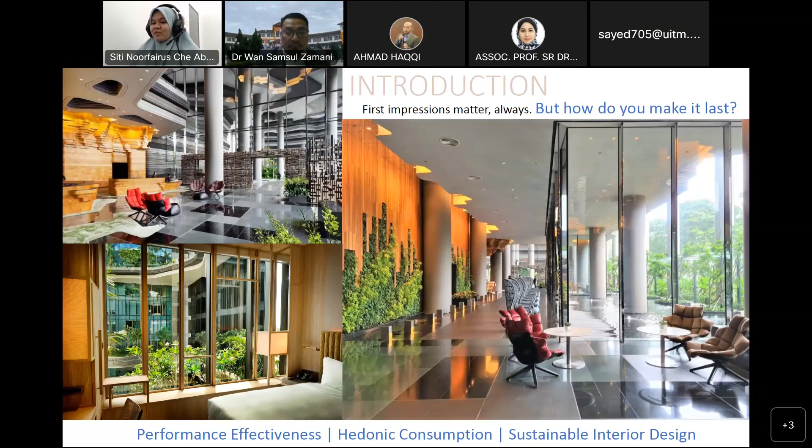Previous researchers support that interior design plays an important role in human mood and social behavior. Hotels are concentrating on aesthetic values as one aspect of perceived experiential value, meaning customer perception towards their staycation experience.

People often see interior design only on the surface of aesthetic visuals, but good design really depends on its solution to give the end user the quality of life they need. It needs to function technically, environmentally, and socially.

Hotel sustainability in business relies on customer satisfaction with the products and services the hotel offers. Since hotel industry services are various and complex, it is crucial to recognize the contextual characteristics and understand the surrounding environment of operations through proper facilities management. Facility management involves multiple disciplines to ensure the functionality of the built environment by integrating people, system, place, process, and technology. To conclude, hoteliers should constantly address the FM concept for business profitability.

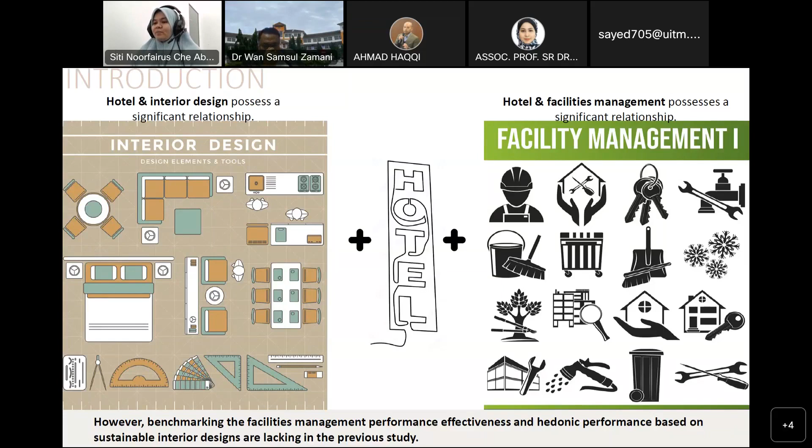To summarize, studies show that hotel and interior design possess a significant relationship, and most studies show hotel and facilities management possess a significant relationship. These two studies are often researched separately, and there is a need to link the study of facilities management performance effectiveness and hedonic consumption based on sustainable interior design criteria.

The activities that happen within the hotel involve customer bookings until checkout. It revolves around people, place, and process. These 24-hour activities, even more during peak holiday seasons, happening inside the hotel industry has an impact on degradation of the environment.

Hotel sustainability in business relies on customer hedonic consumption towards the product and service they experience. Sustainability issues on maintenance management of aesthetic performance, hospitality services, and awareness of sustainable interior design are among significant concerns in hotel performance effectiveness.

In a hotel, the issues in maintenance management of interior design components include dampness, cracks, detachment, wear and tear, as well as biological issues.

Performance effectiveness is defined as the accomplishment outcome of evaluating the building performance to understand how the building meets the design, functions, and its capability. This effectiveness can be measured using a facilities management approach through building performance evaluation.

Therefore, this study aims to identify the components of sustainable interior design requirements relating to facilities management in performance effectiveness and hedonic consumption. The sustainability interior design components will be explored to see their suitability to the context of facilities management towards performance effectiveness and hedonic consumption in the hotel industry.

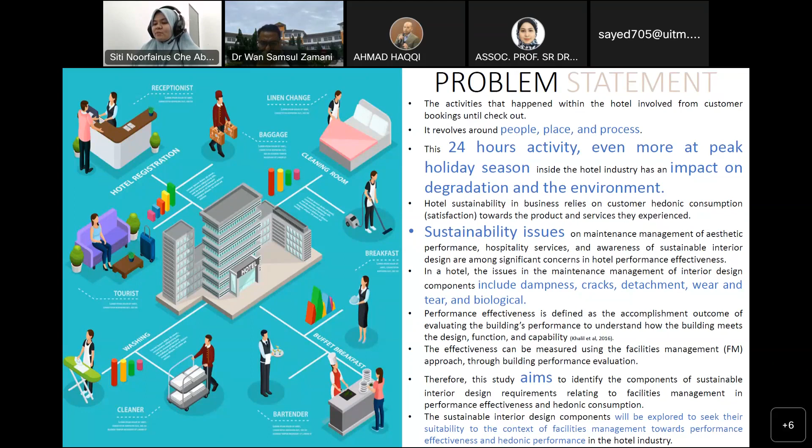Methodology: To establish the aim, qualitative research using semi-structured interview instruments was selected. Purposive sampling was chosen, involving 3 experts. The selection criteria of the experts were chosen from the GBI website. GBI stands for Green Building Index.

The interview session was carried out on separate dates and times and took about 30 to 45 minutes per session. The interview used open-ended questions, and the responses were audio tape recorded and later transcribed into a written document. The data was then analyzed using content analysis and the network presentation of ATLAS.ti9 qualitative software.

The quotations and responses from the interview session were segmented using deductive techniques, where the codings and themes were preliminarily prepared to help achieve the aim.

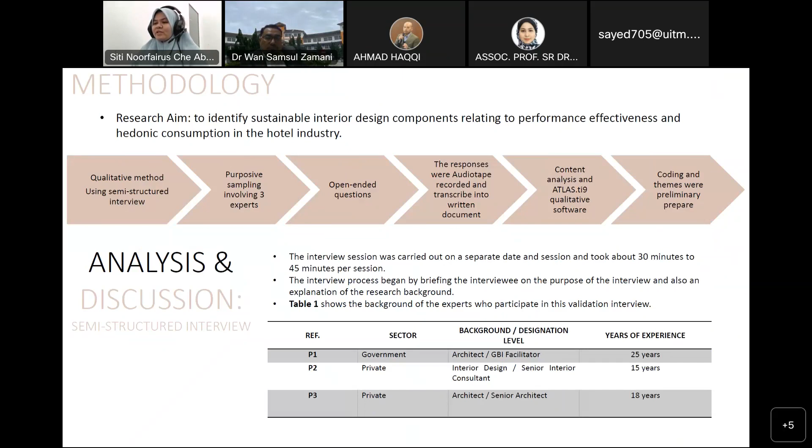Analysis and discussion. Table 1 shows the background of the experts who participated in this validation interview. All participants represent both government and private organizations. The participants comprise senior architects, senior interior designer consultants, and a GBI facilitator. All of the experts are acknowledged in the field of designing green hotel projects, as well as other categories of green projects. In terms of years of experience, all participants have 15 to 25 years of working experience.

The first finding is the suitability and selection of sustainable interior design impacted to performance effectiveness. A summary of findings: the participants agreed that sustainable interior design is associated with hotel performance effectiveness in functional performance, environmental performance, technical performance, and social performance.

Ideally, these performance elements relate to the context of facilities management. As supported by previous research, the robustness of functional and technical aspects is needed for routine extensive maintenance, which includes adaptability, aesthetics, and durability of materials to cater to unplanned functional and technical failures.

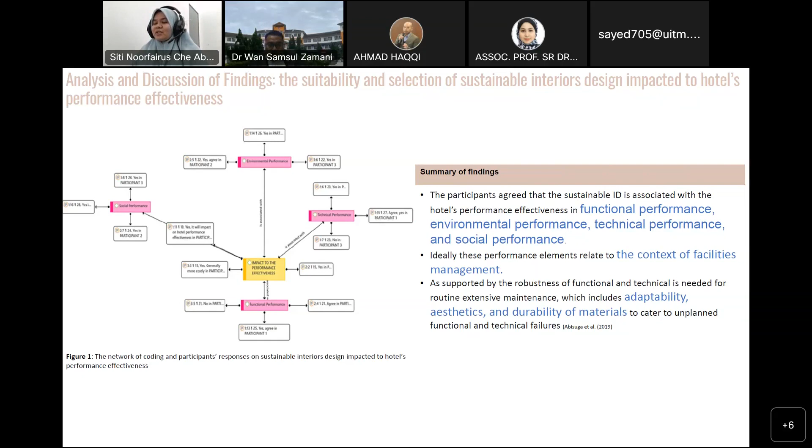The second finding is the suitability and selection of sustainable interior design impacted to hedonic consumption. All participants agreed that interior elements will impact the hedonic elements in terms of customer mood, happiness, as well as preferences. This is aligned with several authors who found that hotel green practice significantly increases the values and pro-environmental intention.

Pro-environmental intention here means all possible actions aimed at avoiding harm to the environment, and both hedonic and utilitarian values. In this context, hedonic means satisfaction, and utilitarian values mean practical design.

The researcher claimed a service that is designed to better satisfy the hedonic and utilitarian needs of the customer will garner a larger market share and higher revenues. To conclude, customer satisfaction and feedback are the main hotel business objective.

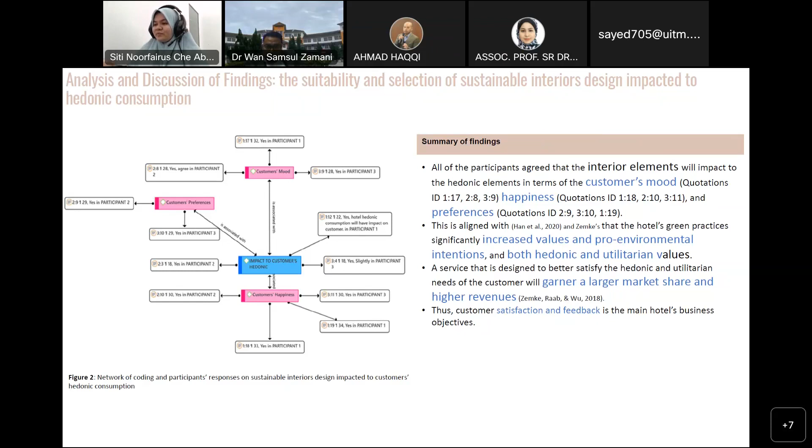The third findings are the criteria for sustainable interior design. The interview participants agreed that the relevancy of 7 initial sustainable interior design criteria consisting of biophilic, energy efficiency, water consumption, health and social flexibility, environmental comfort, ergonomics, and green awareness, as shown in the network of ATLAS.ti.

New suggestions for sustainable interior design criteria on the pink color were suggested, where the criteria of sustainable interior also include reduction of consumption, sustainable interior design components, manufacturer selections, building envelope, and health criteria.

These criteria are aligned with those items listed in the GBI criteria for green hotels. However, those new suggestions are also associated with the criteria of energy efficiency, health, and social flexibility.

The findings also support previous research on efficient usage of space, materials with less impact on the environment, reducing non-renewable energy consumption, and reducing pollution and waste.

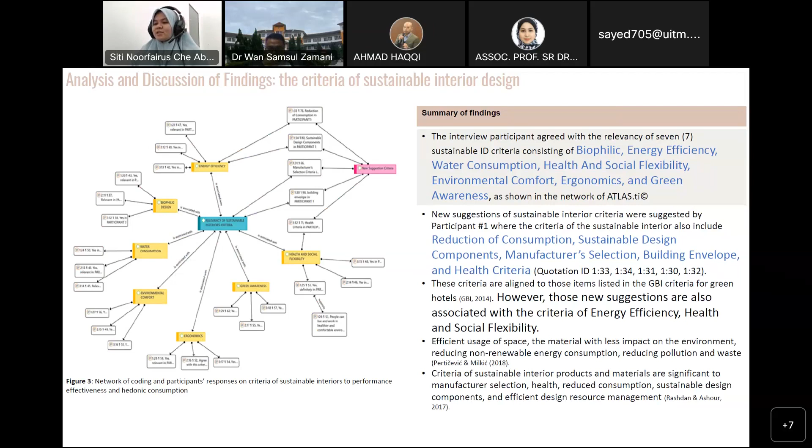Alongside other researchers, they claim that criteria of sustainable interior products and materials are significant to manufacturer selections, health, reduced consumption, sustainable interior design components, and efficient design resource management.

Conclusion and contribution. Identifying sustainable interior design elements in hotels is crucial to establishing sustainable performance and competitive benefits, since they contribute significantly to developing a positive brand image, meeting customer expectations and standards, as well as reducing operational cost.

Sustainability in the green hotel business depends on the combination of management theory and industry green practice. This study is significant to help hotel industry managers as well as interior designers in identifying which aspects of the property are critical to successful performance by integrating facilities management to sustainable interior design requirements.

This study will be further developed to address the subdivisions or subcomponents from the main criteria of the sustainable interior design elements.

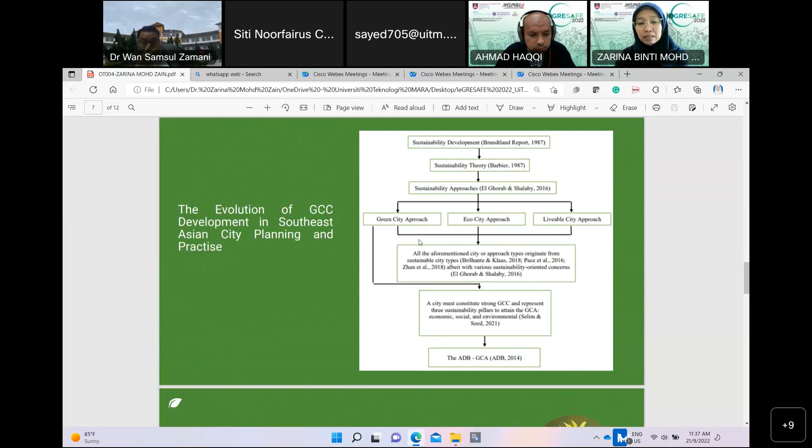So it shows that Melaka had done a lot for the GCC in order to support the Green City Action Plan. Now it's just whether the people, the community, understand and are aware of the effort taken by the government itself or not. So this is the evolution of the ideas that have been implemented for the GCAP in Melaka.

So for this study, quantitative methods were applied in conducting the research, and it enlisted the participation of 86 respondents in total, chosen by convenience and purposive sampling, where all the respondents were given a set of questionnaires, with items focused on identifying the level of understanding and awareness of green technology initiatives in Melaka. The data gathered was analyzed using SPSS.

So from the findings, it shows a total of 86 respondents involved, where the majority of them stay in Cheng area, which is in Melaka Tengah, and the rest are from Alor Gajah, Kuala Sungai Baru, Masjid Tanah, and other areas around Melaka. Looking at duration of stay, most of them have lived in Melaka between 11 to 20 years, followed by more than 20 years. So the majority of them have lived in Melaka for a long term.

From the findings, it shows that people in Melaka have a good understanding of the implementation of green technology initiatives. This can be justified with a total of 220 responses indicating that most of the programs were successfully executed, and they realized the initiatives taken by the government were to support the GCC program, which benefited the community. However, some of them are not aware of the action plan and initiatives because they are uncertain, which contributed 186 responses in terms of the program implemented for the GCC.

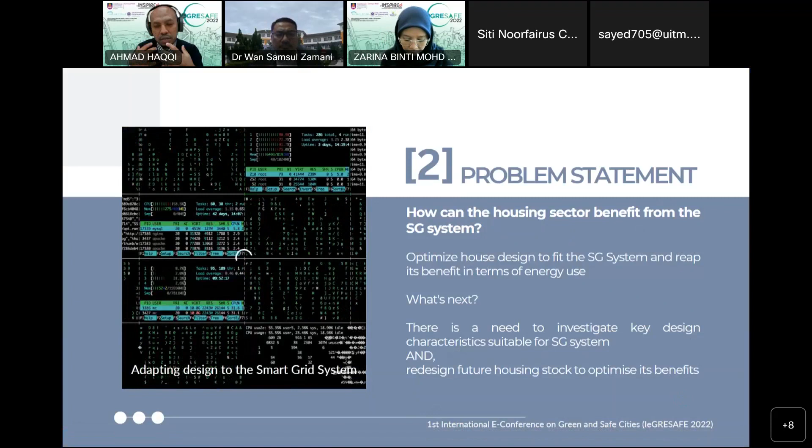So what's the problem statement of my research? Because this smart grid is very intelligent and we see a lot of benefits of the smart grid, we're seeing it from the angle of the built environment. My focus, because the built environment is very huge, so I'm going to scale it down to focus only on the residential sector.

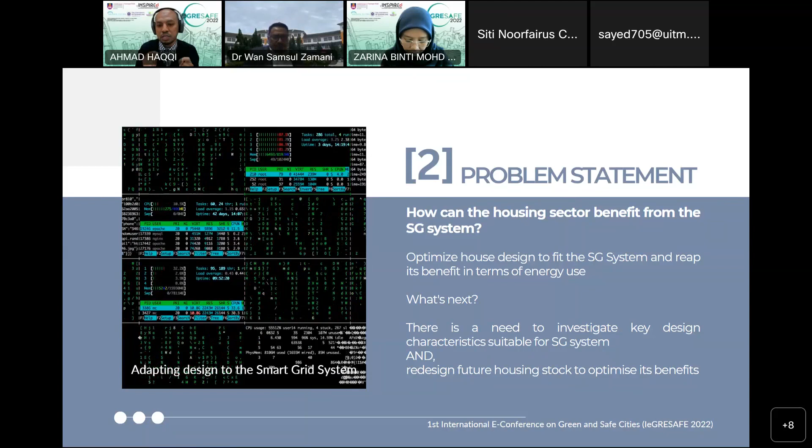So my question is, how can the housing sector benefit from the SG system? Hypothetically, is it possible to optimize the house design to fit the smart system and get its benefit in terms of energy conservation and energy use? So what's next, there is the need to investigate the key design characteristics of housing to fit the SG system and redesign future housing stock to optimize its benefit.

From my vast study trying to find out the different strategies on how to maintain or reduce energy in buildings, what I found is a tri-level energy conservation strategy. The very basic approach is to implement passive strategies, then we increase the enhancement to include active elements, and on top of active elements, there are intelligent components.

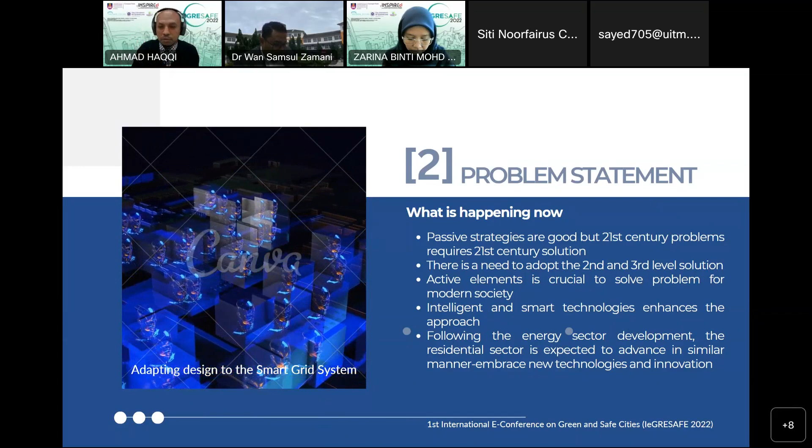Passive strategies are good, but we need a 21st century solution to fit 21st century problems. We need to adopt not only passive strategies but also the second and third level solutions, because active elements are crucial to solve the problems of modern society. Modern societies need electricity, because electricity is now a necessity, not just food, clothing, or housing. We need gadgets, we need to communicate, we need to connect to people everywhere around the world, because we don't connect socially and physically anymore, but online.

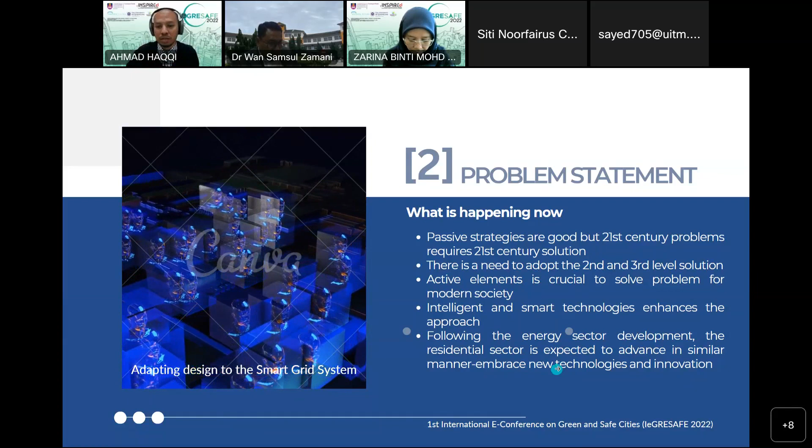We need to have a colder environment. We're used to being in a conditioned environment - we go into cars, into supermarkets, we get out when it's too hot and try to get back into the building. There's also a rise in intelligent and smart technologies to enhance the way of life - the quality of life has been elevated because of these technologies. Following energy sector development, the residential sector is expected to advance in a similar manner to embrace these new technologies and innovation. So why not let residential move along and take this advantage?

So what are the strategies for buildings and energy conservation? According to DELEAP 2020, there is a way forward by including smart technologies into these strategies to conserve energy in buildings. So on top of passive, we need to add active, and also need the intelligent component.

So what is the aim of my paper? My aim is to identify critical design parameters concerning buildings, concerning energy consumption, and concerning the relevant smart grid components. So, point of departure, my objective.

First, potential smart grid components for design optimization - the smart grid transition is happening. According to Dean et al. 2019 and Martin et al. 2017, electrification is happening not only in Malaysia but globally, and decentralization is taking place. Digitalization in electricity is also taking place. With the implementation of smart grid, the electricity supply is becoming more intelligent, adaptive, self-healing, resilient, and a sustainable bidirectional flow power system is happening in the modernization of the electricity grid.

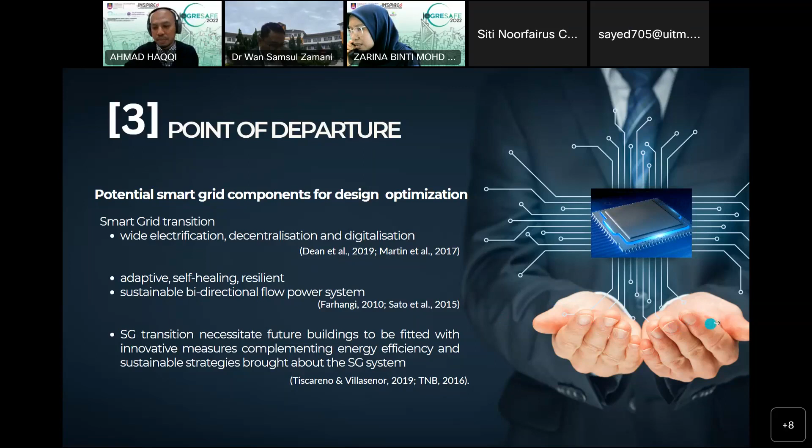So I'm taking a model from the National Institute of Standards and Technology, NIST, on the smart grid conceptual model for design optimization.

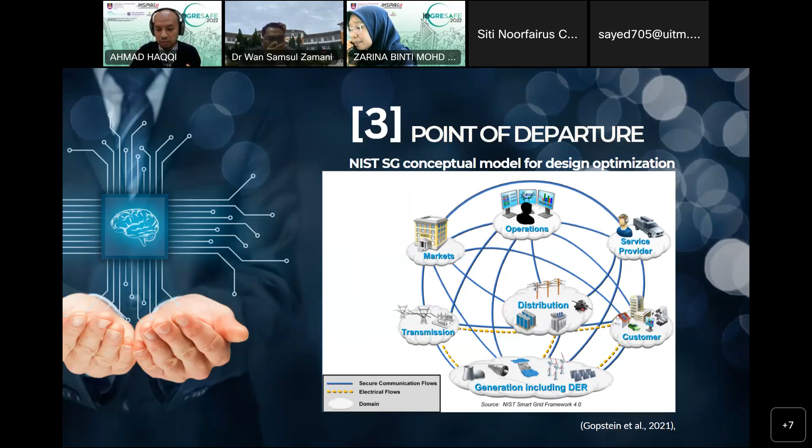These components of the domains which I found in the model - there are 7 important domains. From this model, according to Gopstein et al. 2021, the latest one, I'm taking that domain and trying to compare it with the literature I found. What I found from the literature is that Han, and also Anang, Ali, Magani, Abdul Salam, Sabri and Hamid, mentioned that there is a component from the smart grid talking about energy generation and also residential.

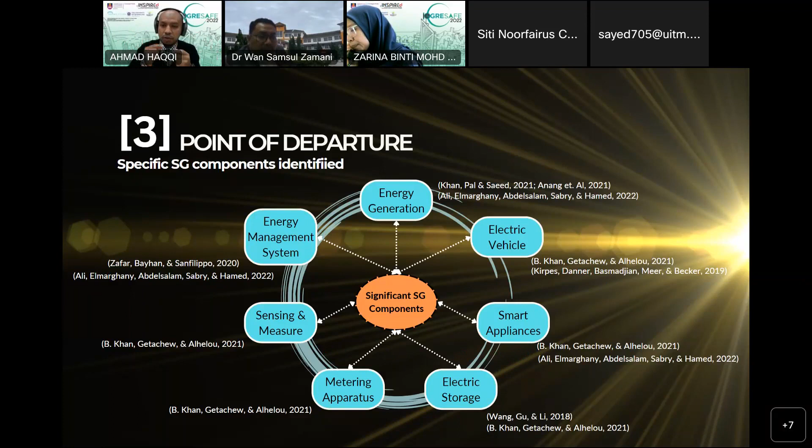There's also a component of the domain from the smart grid talking about electric vehicle and smart residential, then smart appliances connecting back to the SG components, talking about electric storage connecting back to the SG components, then metering apparatus, sensing and measuring, and lastly the energy management system. So there are 1, 2, 3, 4, 5, 6, 7 components that are relevant or significant to the SG components.

Now, for this paper, my approach is using Atlas TI. I adopted the approach proposed by Pujara and Joshi 2020, so the analysis uses Atlas TI as the software for analysis.

I did a document search and found 50 documents. I filtered them, trying to reduce the documents or components which are not relevant, so I discarded those, and found 15. From these 15 documents, I conducted a thorough content analysis using Atlas TI as the software tool to help identify significant terms and codes, and I found 26 codes.

From the 26 codes, I categorized them and found 15. From that 15, I did a co-occurrence analysis, which is also done in Atlas TI.

Before I go further, let me explain what I'm trying to find out from this content analysis. From the documents stating passive strategies, for example, documents like the UBBL (Uniform Building Bylaws), the GBI or Green Building Initiative documents, the LCC (Low Carbon Cities Framework), and the MyCREST document—MyCREST is JKR.

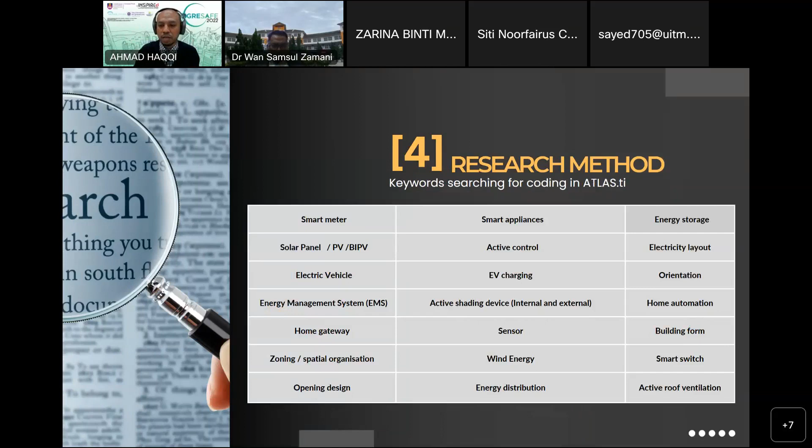Based on my literature review, I found a few keywords from searching. These are the keywords I put inside the software so I could compare and code them, and from this I got the co-occurrence analysis output.

Further analysis using Atlas TI shows the category can be separated into smart components, active elements, and passive components. These are the connections or network between the codes and elements that I found in the documents.

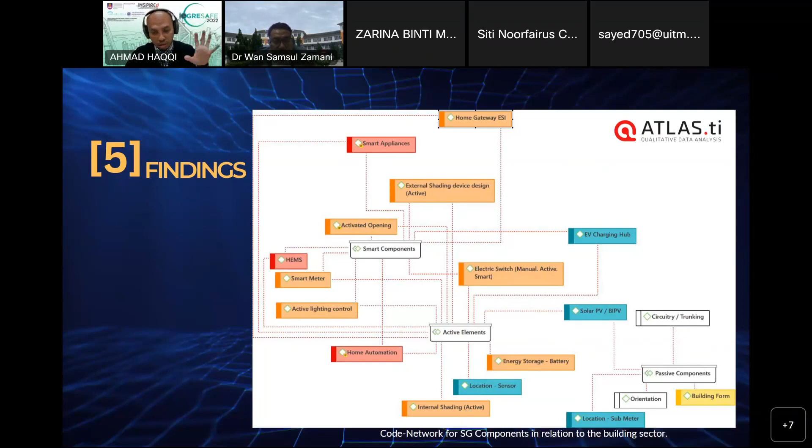So what does this mean? It means that in passive strategies, we can still maintain the building form, orientation, layout design, and placement of components. These are the passive components which can be related to the smart grid components.

What are the active elements? They are battery storage, sensors, solar PV, and building integrated photovoltaic. What are the further enhancements of intelligent components? EV charging hub, electricity switches, smart ones, activated shading devices, home automation, smart meters, activated opening, and the home energy management system.

From this finding, I separated them. On the left list are the design parameters for the passive part, and the bottom one is the active components for design parameters. On the right part are the potential SG components from the passive that can be connected, and what can connect the design parameters of active components to the smart grid system.

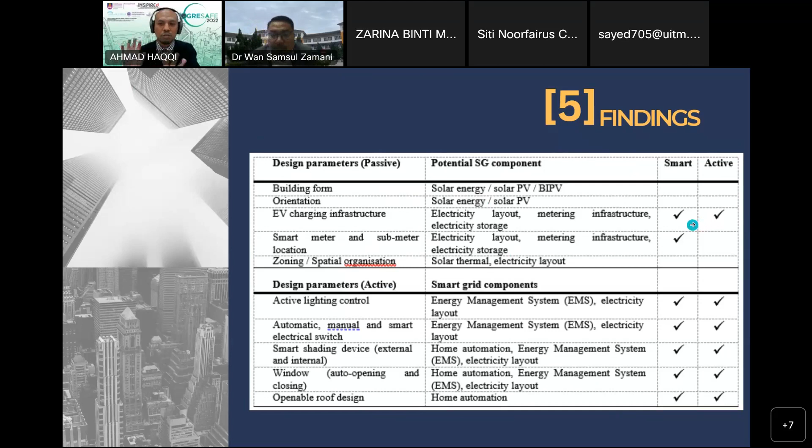So I found that these are related to smart components and others related to active components. From that list and the co-occurrence connections, I created a building checklist, listing the different smart grid components related to the residential sector or housing unit.

The Ex is external, IN is internal, Y is yes or no whether it's present in the building, and whether the smart component or active component is present—these are the items. Unlike other types of building checklists, this one is focused only on items of the smart grid significant to the smart grid system.

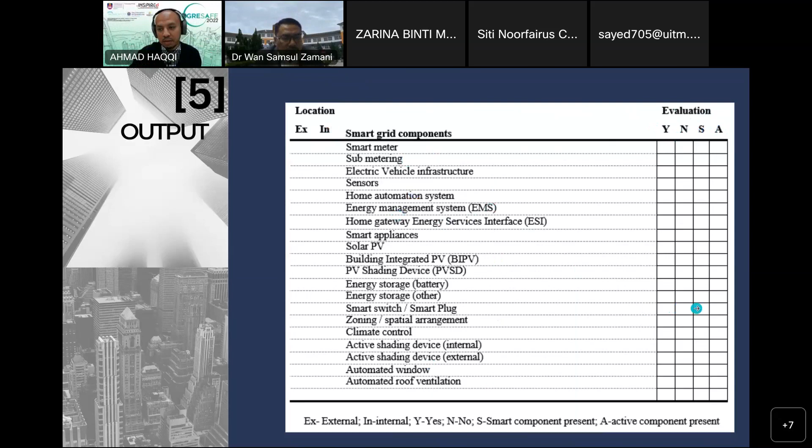Okay, so as a conclusion, for SG components for housing design, selecting components of the smart grid system and building design attributes suitable for optimization strategies should be aligned for the smart grid system. Components of smart grid linked to the residential unit are heavily dependent on the SG node, which is the smart meter, the energy management system, and also the home automation. So without these three components, it's quite impossible to say that your house is a smart grid optimized house.

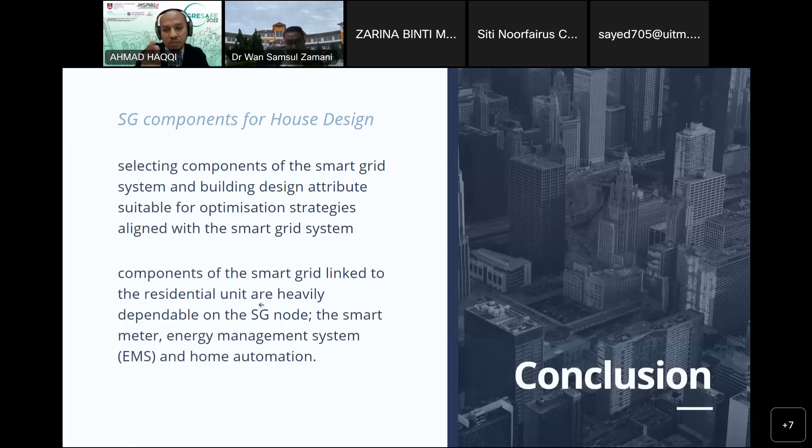And then a wide range of implementation is proposed, meaning that SG components discovered depicts a certain degree of smartness and active characteristics. How do you define that a building is smart grid optimized? There are different smart houses with different degrees of intelligence. The more intelligence or technology components you implement inside the house, the more investment you need.

So different amounts of these technologies will benefit different levels of social income groups, thus benefiting society's respective social classes. Even the B40s, those not doing very well in terms of economy, they also want to get this benefit from the smart grid system. So it's possible to implement, but not to a certain degree—you have to invest more, because buying technology is very expensive.

And lastly, implementing these optimization strategies will benefit a myriad of stakeholders across the residential sector. So I guess that's all from me.

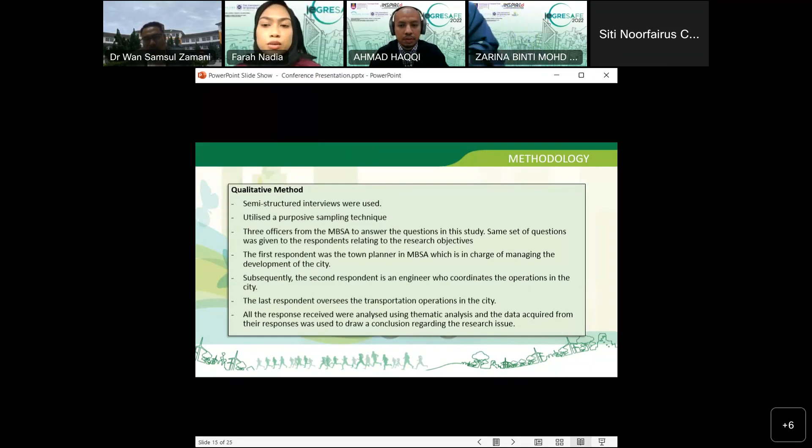All the responses received were analyzed using thematic analysis, and the data acquired from their responses was used to draw conclusions regarding the research objectives. So next, these are the responses and feedback from the respondents.

From the findings, it can be concluded that all the parameters - urban environment, urban transportation, and urban infrastructure - are used in order to take measures in implementing the LCC program.

Based on the first respondent, waste management provides numerous advantages, especially in terms of economy and environment. In fact, waste disposal is among the highest of MBSA's expenditures. So throughout the waste management efforts by MBSA, such as garbage segregation, this negative impact can be reduced tremendously. Additionally, according to the first respondent, public awareness is important to ensure that the program is successful.

However, according to the second respondent, this would not be made available if financial support was not given to MBSA. He added that with more funds being allocated, it will attract more investment through their green building projects, which ultimately benefits the economy. They also managed to get funds from IGES, amounting to 60,000 USD, which gives benefit to their financial economy as the fund can save their own budget for future plans.

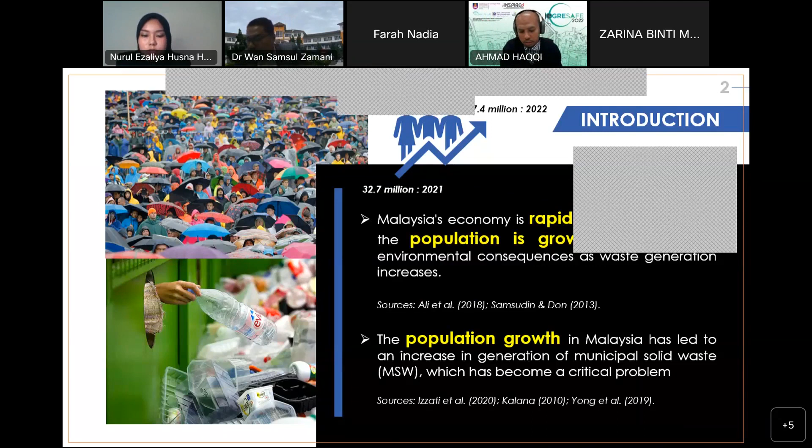Population growth in Malaysia has led to an increase in municipal solid waste, which has become a critical problem needing serious management. The population in Malaysia is projected to be 32.7 million in 2021 and expected to be 37.4 million in 2022 as urbanization continues.

Municipal solid waste is a term used to describe a wide range of solid waste generated by cities and municipalities as a result of consumer activities, including electronic, biodegradable, and composite waste, as well as medical waste, which currently is produced and processed at 25,000 metric tons per day in Malaysia, or 0.5 to 1.9 kilogram per capita per day.

Nevertheless, a large part of the country's e-waste is generated as a result of population growth, rapid urbanization, and high demand for electronic devices and their eventual disposal at the end of their useful life. In Malaysia, electronic waste or e-waste has existed since the 1940s when electrical devices were introduced.

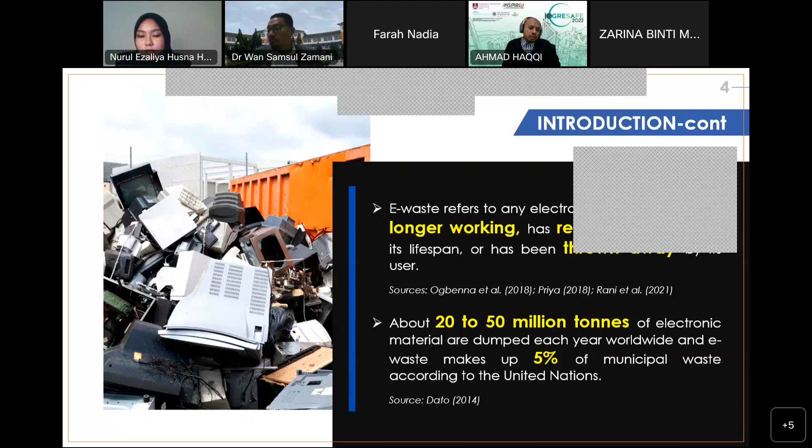E-waste refers to any electronic product that is no longer working, has reached the end of its lifespan, or has been thrown away by its user. It's estimated that about 20 to 50 million tons of electronic material are dumped each year worldwide, and e-waste makes up 5% of municipal waste according to the United Nations.

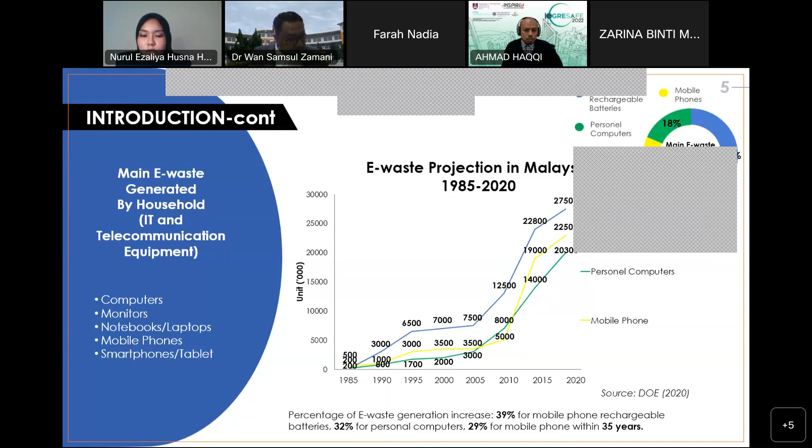Human health and the environment are at risk if this e-waste is not properly disposed of. So currently, e-waste is poorly managed due to the challenge of household awareness and behavior toward the e-waste management system in Shah Alam City.

By analyzing household e-waste generation, separation and recycling in Shah Alam City, I aim to identify the challenges of household awareness and behavior toward e-waste management.

Next is literature review. For household e-waste terminologies, I came up with the household definition, e-waste, and then household e-waste. Household e-waste is defined here as electrical and electronic waste generated by households.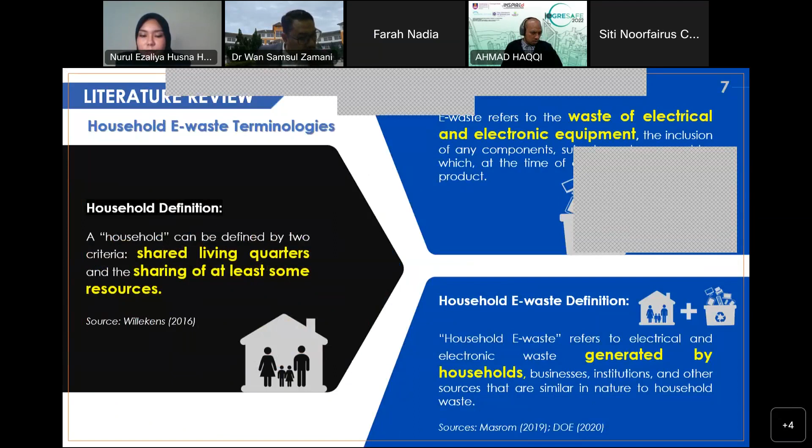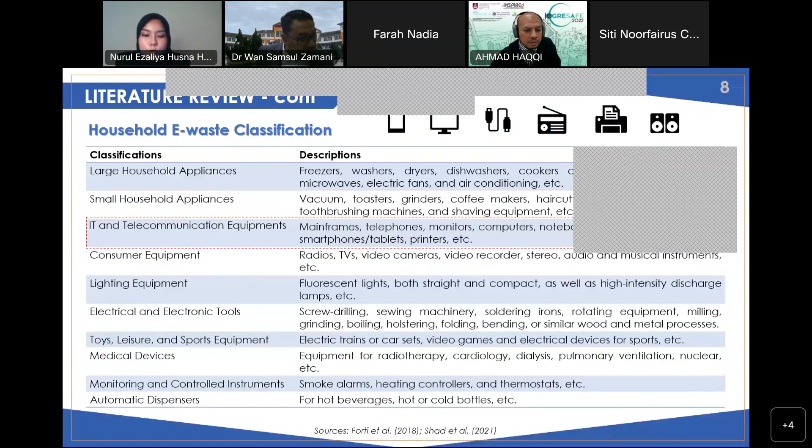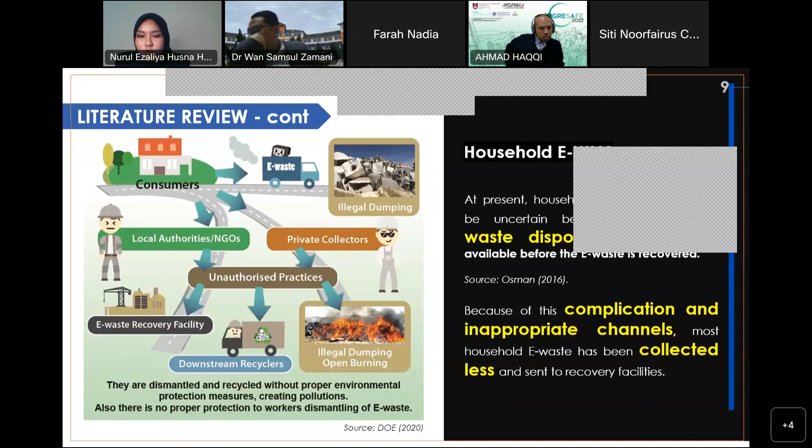The major challenge resulting from these issues was household awareness and behavior, based on previous studies. According to Almulhim 2022, household awareness is one of the success factors in developing a long-term strategy e-waste management system, which is important in creating economically and environmentally friendly management. Moreover, multiple studies have looked to improve household awareness and behavior in dealing with e-waste. The primary approach used in managing e-waste has been an attempt to change people's behavior and increase their awareness of the environmental problem e-waste presents.

Increased awareness and behavior among consumers will play a significant role in reducing e-waste, helping manage e-waste dumping, and improving recycling strategies.

For methodology, this study used a qualitative approach to determine household awareness and behavior toward household e-waste management system. A semi-structured interview was conducted with 10 household representatives in Section U2, Shah Alam City, in January 2022. Section U2 Shah Alam City was selected as the study area because of the facilities provided, such as e-waste collection point, recycling center, and e-waste program by its local authority, which is more concentrated in this area. So 10 participants were involved. The result derived from a screening form conducted to select participants based on the criteria set. The criteria include participants who live more than 5 years in Shah Alam City, from landed housing.

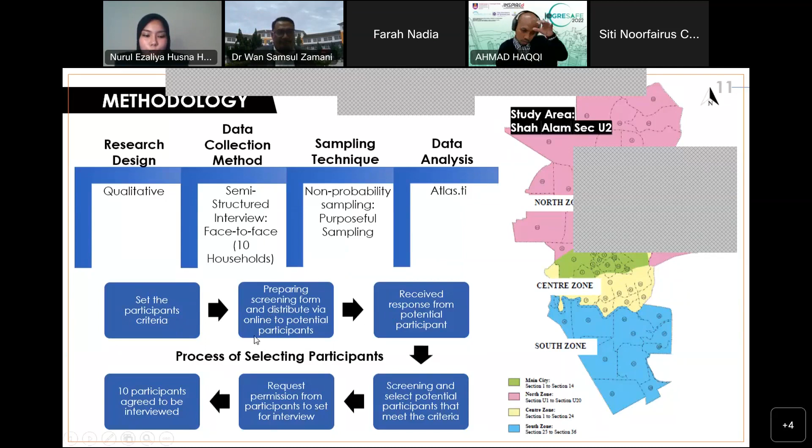So next is the result. Several questions focusing on waste generation, separation, and recycling have been asked to participants to determine their awareness and behavior toward the e-waste management system in Shah Alam City. From the responses of e-waste generation, most of the participants have generated mobile phones. However, their way of discarding the item was not proper, as most of them have discarded it in waste bins together with other waste. Therefore, their way of discarding the item shows their awareness and behavior is weak in managing their waste.

From the responses of e-waste separation, several participants admit that they are not doing e-waste separation, and several participants admit they are doing separation. However, the majority are not doing separation before discarding the item. This response shows that waste separation practice is lacking among the household, even though the local authority has already exposed the resident to waste separation.

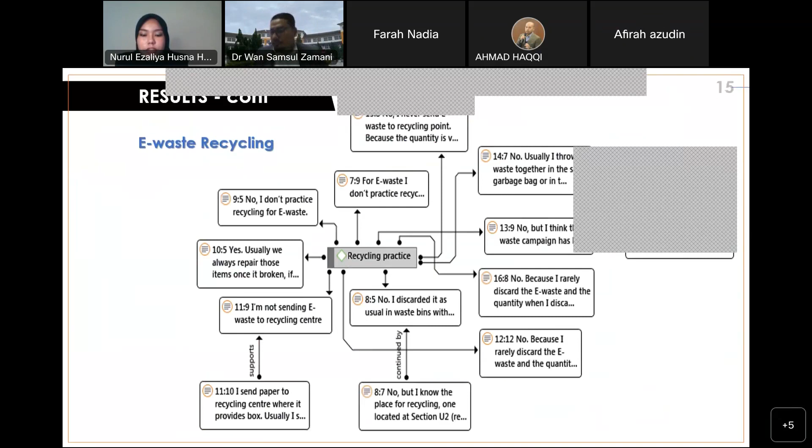From the participant responses on recycling practice, most of the participants admit that they do not practice recycling for e-waste. Therefore, the recycling practice in Shah Alam City can be considered still lacking, creating constraint and challenge for waste reduction. This issue is also supported by previous research, which indicates the major problem relating to e-waste in Malaysia is the poor attitude of Malaysians toward e-waste recycling.

So next is discussion. The awareness and behavior of household are the major challenge for e-waste management system. This challenge resulted from participant responses on how they discarded the e-waste and their separation and recycling practice. Household living in Section U2 landed urban neighborhood have generated e-waste from IT and telecommunication equipment. Their way of discarding the e-waste can be considered poor, as some of them are still discarding the broken items in the waste bin together with other waste due to insufficient e-waste storage.

However, at this moment, e-waste storage in Shah Alam City is provided in recovery facilities and a recycling collection point for temporary storage. The local authority, which is MBSA, does not provide e-waste storage in residential area. In addition, separation practice among households is still low, as they tend to mix waste together in general waste bins provided without separation. Although there are recycling centers in Section U2 that provide facilities for residents to discard their e-waste, not all residents are aware of the existence of these facilities, resulting in a low recycling rate of e-waste received.

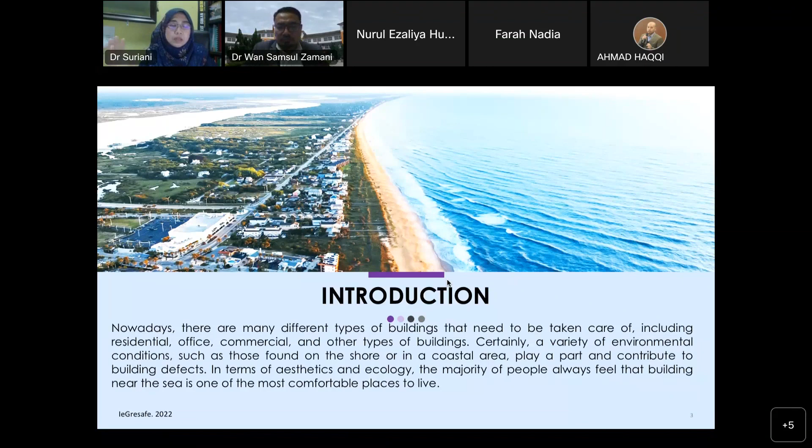For your information, more than half of the world's population now lives near the sea, within about 60 kilometers, and this number is growing. Climate change is having a significant impact on most of the world's coastal regions.

Here we move to the literature review about coastal environments. For the coastal environment ecosystem, locations where land and water come together form an environment with its own structures, diversities, and energy flow. Salt marshes, mangroves, wetlands, estuaries, and bays are among the various varieties of plants and animals that live there.

Next, we move to the literature review about defects that are always discovered at coastal areas. This is the defect that happens due to strong waves and high wind, especially during monsoon season, which may cause erosion problems.

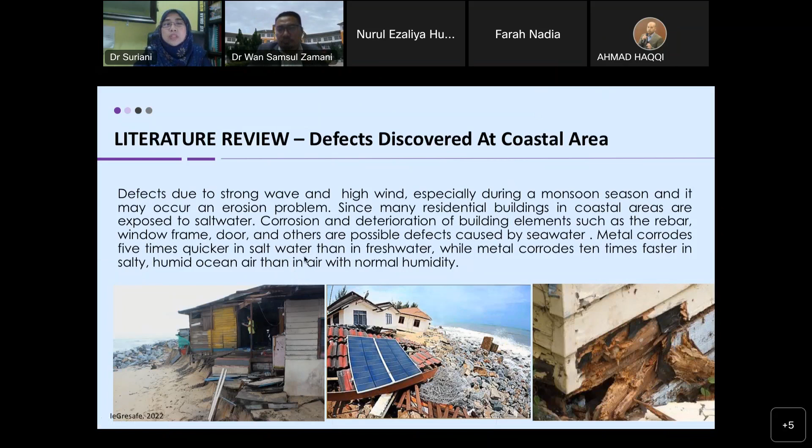Since many residential buildings in coastal areas are exposed to salt water, this causes corrosion and deterioration of building elements such as rebar, window frames, and other elements — all possible defects caused by seawater itself. Metal corrodes 5 times quicker in salt water than in fresh water, and 10 times faster in salty, humid ocean air than in air with normal humidity. Our situation here is normal humidity without salt air.

Here are the main agents of defects from the literature review. As you can see, there are 6 main agents. This knowledge is something we need to know, because before we diagnose all the defects, we need to understand these main agents.

The first agent is the mechanical agent, which is, for example, forces applied, impactions, ground pressures, dynamic vibration, wind, and water.

Number 2 is electromagnetic, which comes from solar radiation, ultraviolet radiation, visible wave band, and infrared radiation. Number 3 is the chemical agent, which involves reactions from water, oxygen, sulfate, and other chemical agents.

Number 4 is biological, which comes from humans, animals, plants, and microorganisms.

Number 5 is the thermal agent, such as temperature, fire — meaning severe fire — and climatic conditions. The last one is natural disasters, such as earthquake, tsunami, flooding, landslide, and forest storms.

As you can see here, there are 5 changes. I've listed changes in terms of the composition or conditions of the material used. These changes mean changes to the material, which we can call defects.

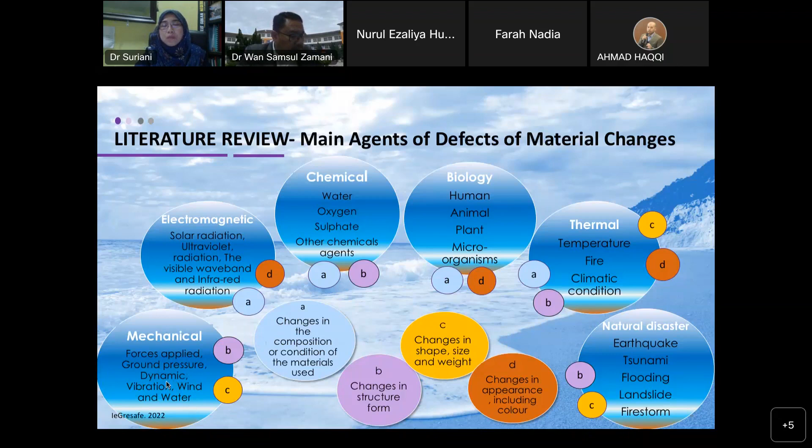Okay, here's the methodology of my study. We will start with the case study, which is along the Terengganu Beach.

For the diagnosis, I conducted it with non-destructive test equipment. As mentioned before, the factors that contribute to the defect are mechanical, biological, thermal, electromagnetic, chemical, and natural disaster. Then we identify the defects.

From here, we come out with questionnaires and interviews, and also building observations for the case study. Then from the data above, we try to get prevention recommendations for buildings near the beach.

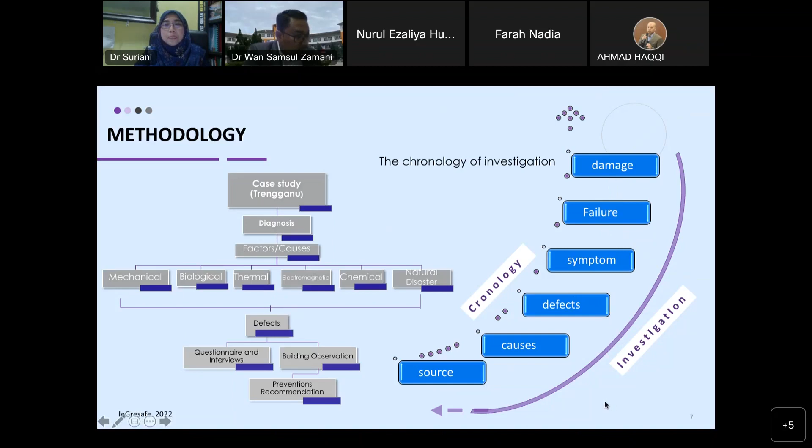Okay, next. Here's the result of my case study. The case study was subjected to observation and also qualitative methods.

There are 3 locations with 4 case studies, which is at Batu Rakit Beach, Seberang Takir Beach, and also Tok Jembal Beach. The distance from the beach ranges within 5 meters to 300 meters, and the age of the buildings ranges from 5 years to 70 years.

The building type is 1-story and also 2-story buildings, and the building material mixes from timber and also concrete.

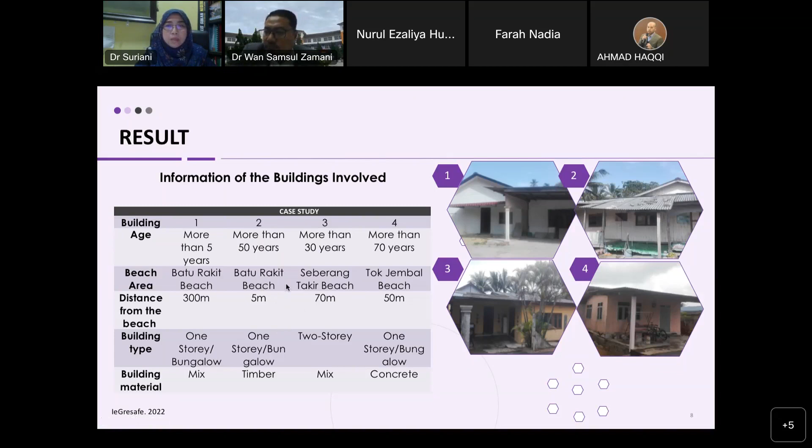Here's the finding for the buildings. As mentioned before, there are 4 buildings for my case study. For building 1, the corrosions of the louver windows and door hinges in buildings built near the seaside are subjected to seawater intrusions.

This is a result of the coastal area wind direction, which consists of salt air, affecting the building itself.

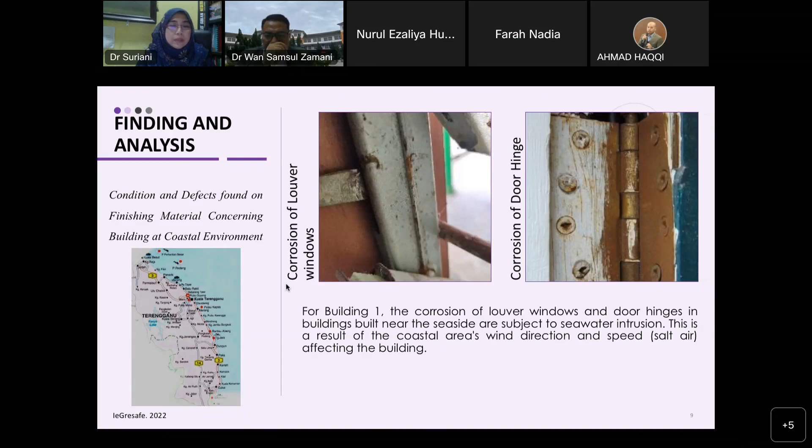Meanwhile, for building number 2, the corrosions of electrical equipment and door hinges are caused by exposure of salt water to electrical appliances in the buildings. This is a form of corrosion that occurs when 2 different metals with physical or electrical contact are immersed in a common electrolyte, such as salt water.

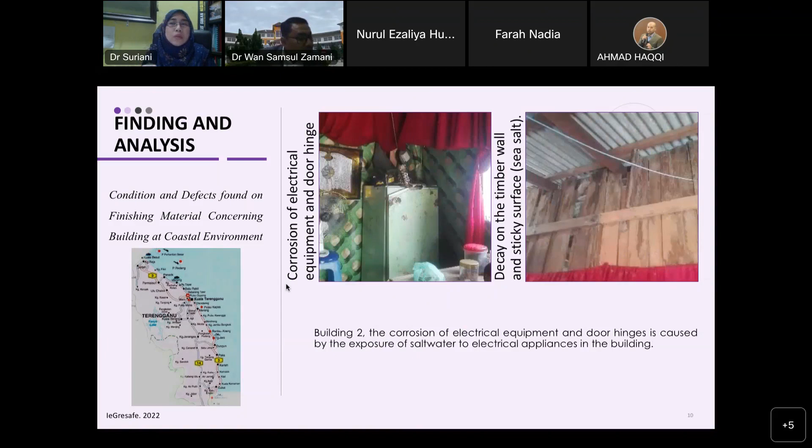Next, building 3 is subjected to seawater intrusions. The peeling of the paint due to dampness, sticky surface, and corrosion of louver windows are the symptoms that can be found in this building.

This is a result of the coastal area's wind direction and speed, which consists of salt air again. The speed and direction of the wind is determined by the weather of the area, depending on the weather that day.

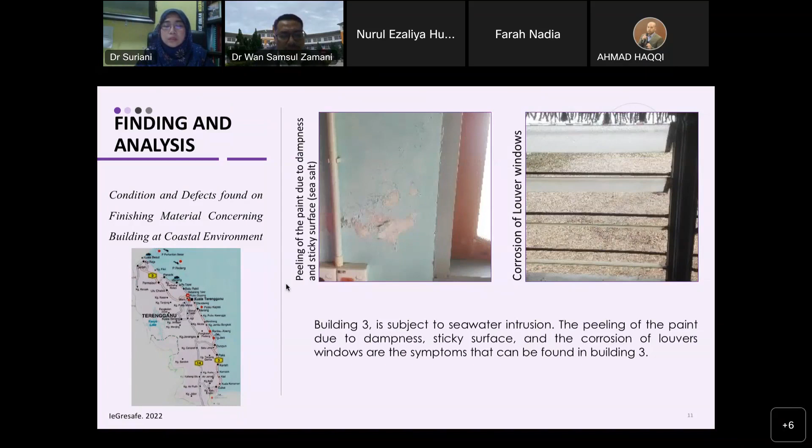Next is rust on the metal components and decay of the timber structure, which can be found in building number 4.

In the coastal area, the quantity of moisture present in the air is higher than in the desert, so rusting of iron objects is faster compared to normal areas.

Biological damage to the above-water parts of waterfront structures is caused directly or indirectly by the activity of fungi and insects that utilize the wood as food. Therefore, we can see the timber sometimes decays due to fungi attack.

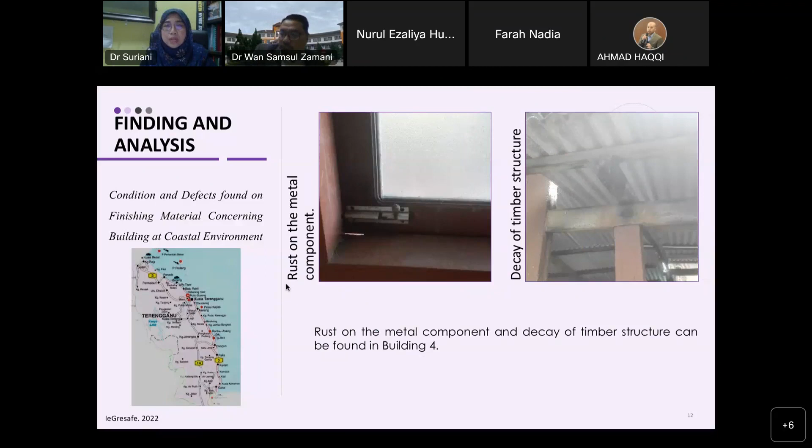Okay, next is the finding and analysis. All of the respondents had sufficient local experience. The questions started with general matters such as age of the buildings, then moved to particular issues regarding the defects that occurred in the building.

As a result, they are familiar with the coastal environment and the usual issues that affect a coastal home. There were 50 respondents who received a qualitative survey on defects and the agent causing factors for the building.

According to the qualitative findings, a high percentage, 96%, of the elements experienced were rusty components, missing roof, decay, and dampness conditions. Mold growth came second at 88%, followed by termite damage at 82%, peeling of paint at 60%, chalking at 44%, damage at 38%, erosion at 22%, and cracks at 20%.

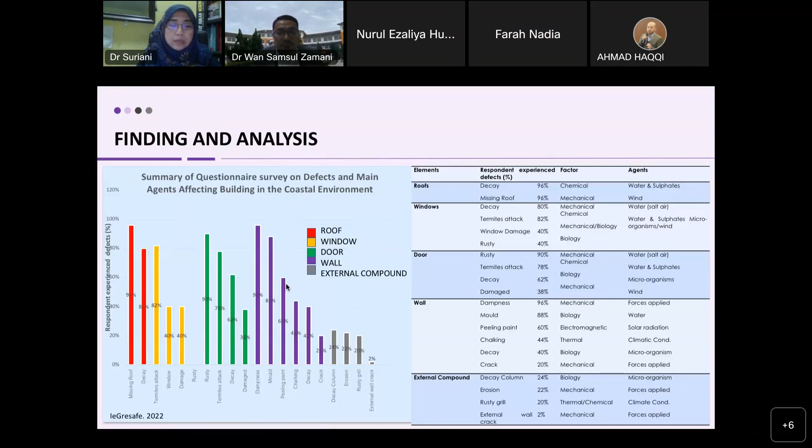For the conclusions, the result interpretation has been laid down to confirm the contributing factors and main agents affecting building defects in the coastal environment of Malaysia. Preventions for coastal defects to limit future difficulties were explored based on observations and questionnaires. These findings suggest that building owners in coastal areas should consider material choice, especially near the sea, selecting materials stable against significant wind, vibrations, and that can survive the reactions of sea salt content.

Furthermore, the building owner is responsible for doing routine maintenance by performing planned maintenance, visual inspection, and building condition assessment. For instance, by doing monthly and yearly scheduled maintenance. From there, we hope the building performance can be monitored, which may also contribute to reducing building defects in the future.

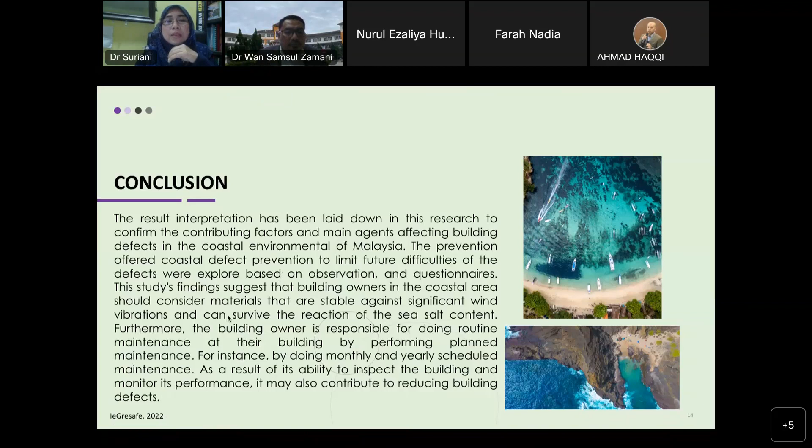I think that's all, Doctor. Thank you so much for listening to my presentation.